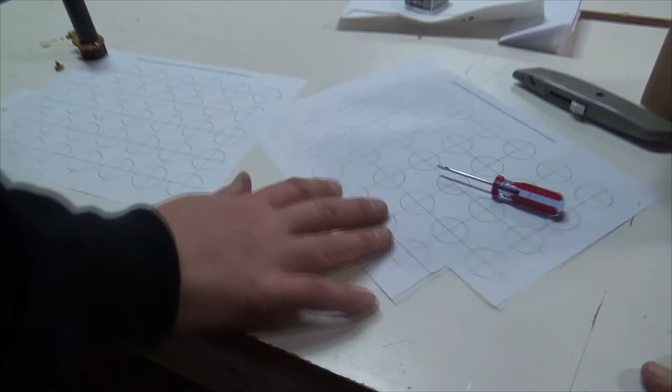So these are the targets. You've got one, the file name is laser alignment mirror targets, and the other file is laser alignment final target. The difference is 25 millimeter diameter and 28 millimeter diameter, 28 point something 4. I'll show you why I did that in a bit.

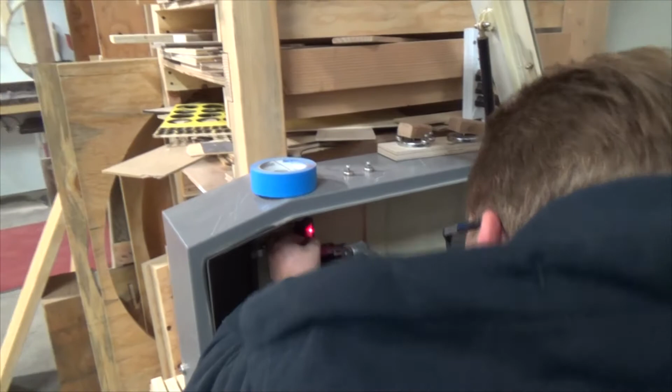Alright, so you take a 25 millimeter target and you try to get it centered on the mirror holder. Piece of tape on it. Get it.

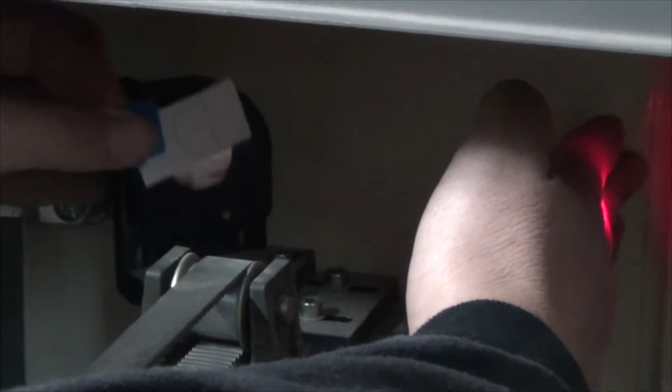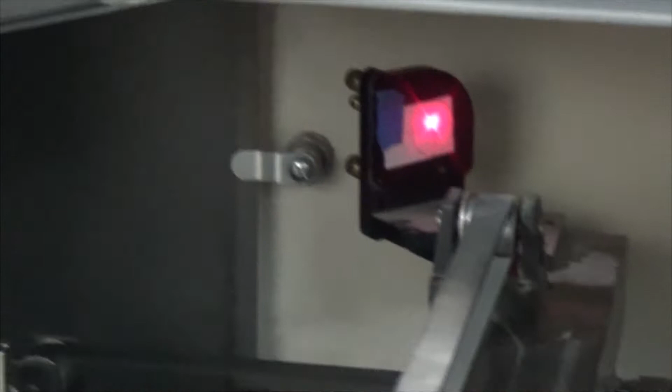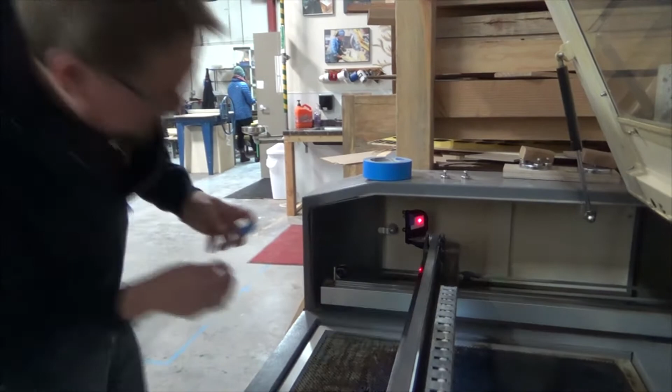Centered, completely ignore the position of the red dot, because we don't know if the laser beam itself is aligned yet. So the red dot doesn't mean anything until we get the beam itself. So you want to block the red off so I can get a good shot of it, yeah, there it is.

Alright, so that's mounted on, prepared for alignment. Yeah. Okay.

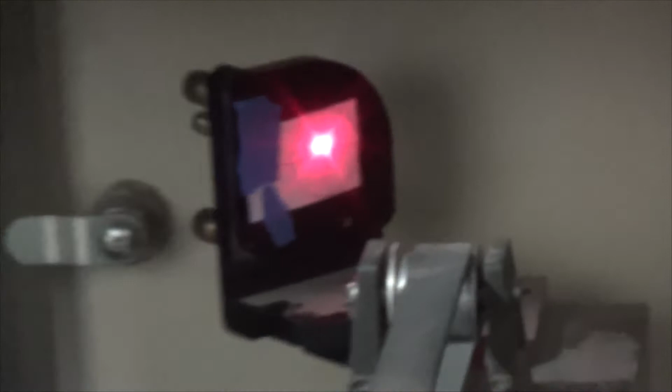Then we're gonna move to the test fire option, which is the lightning bolt. To do that, you have to move into one of the Z move modes. So we're gonna hit this until it says fast Z and test.

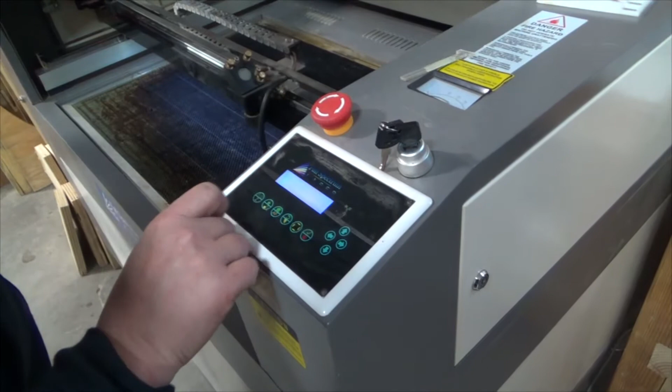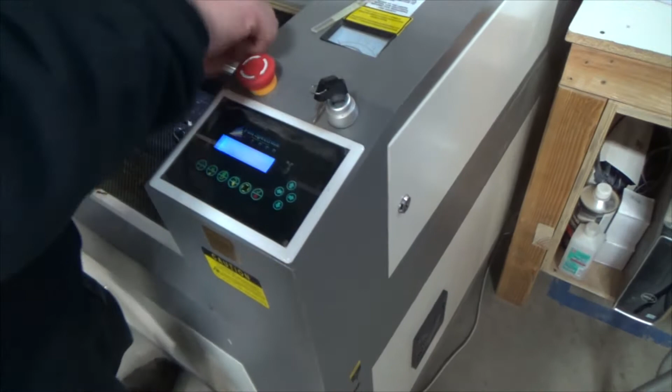We're gonna take a magnet, a strong magnet, put it on the, bypass the safety, and your cooling on/off switches over here. We'll need this.

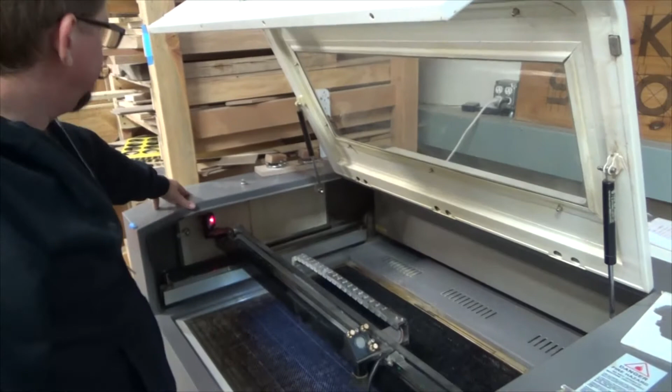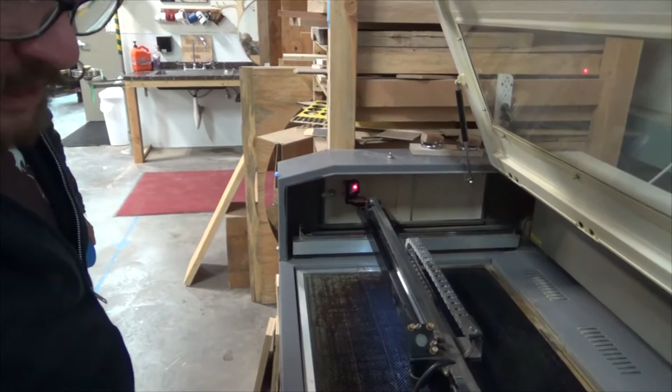Then we'll hit the test fire button a few times, until we get a mark on the paper.

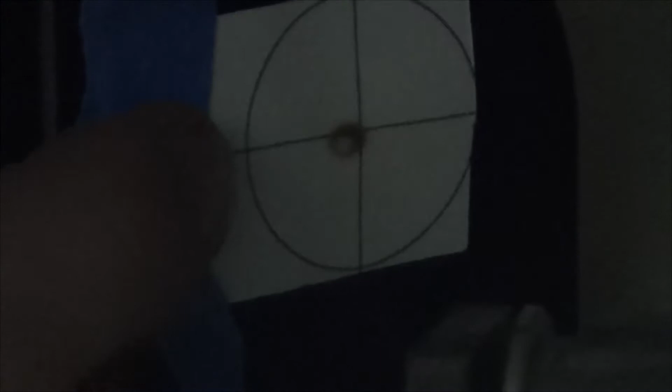So right now, we've got a dot that's pretty much centered. Really, you don't, this is good enough. You don't need to worry about getting all the way back there and adjusting those mirror adjustments. You can totally get this in line using this.

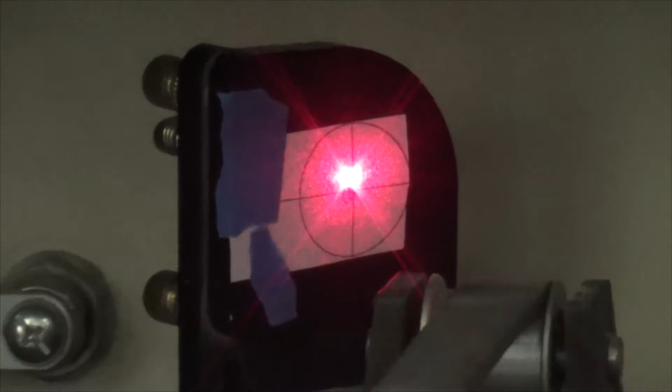So we'll take off the target. Tightening that one. The beam needs to move back, so the mirror needs to kick up like this a little bit. Loosen the lock nut. Give it a couple turns to adjust.

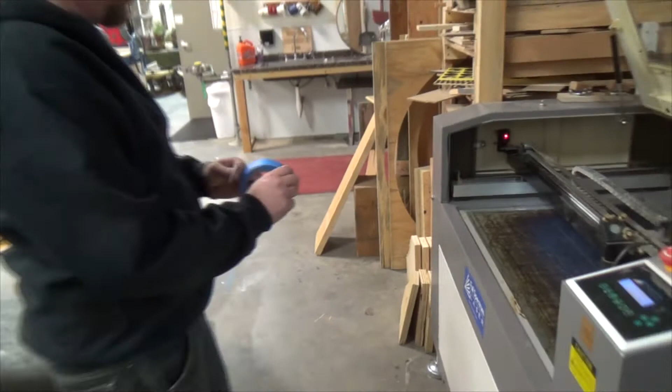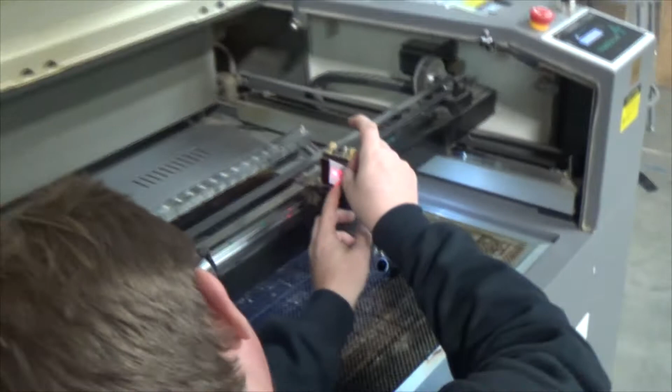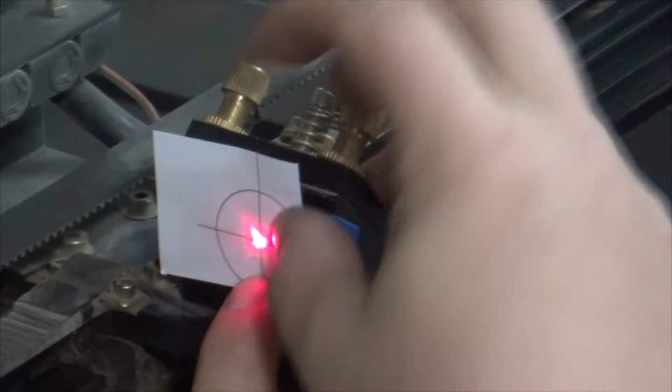Fire again. There's our new dot. We're good this way. Need to go a little bit more. There, it is.

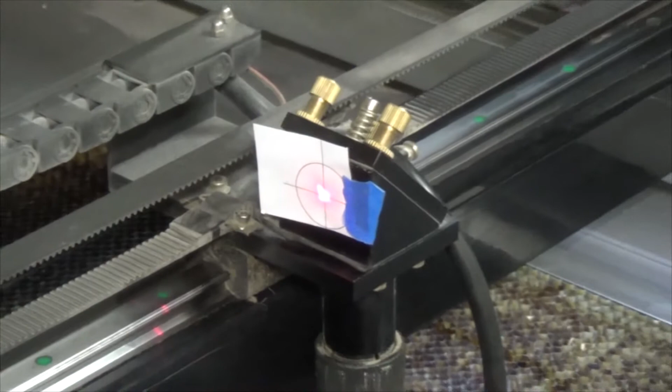Test fire again a few times, making this little adjustment. Okay, so you can see our scorch mark is centered left and right, but low.

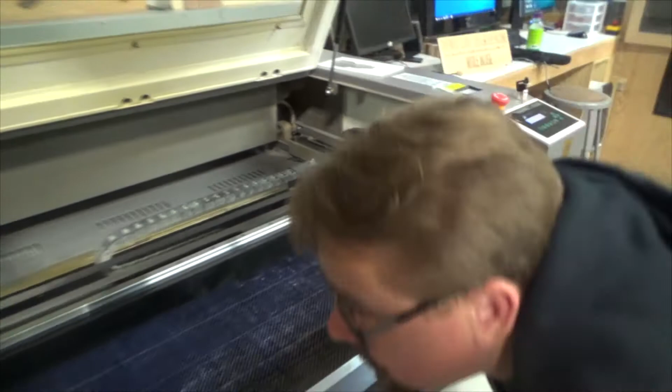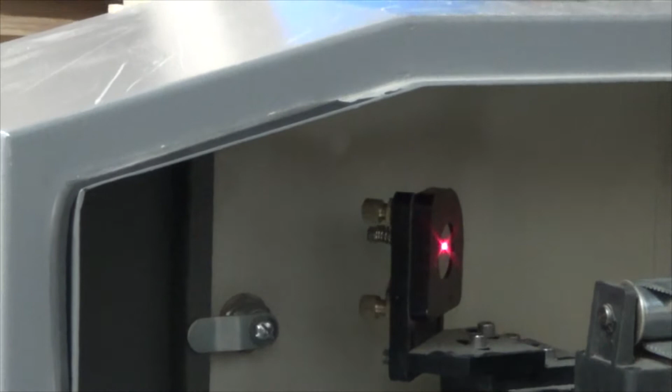So on the back of the mirror housing, this way, and this one will adjust the mirror this way. The secondary mirror back there has the same thing, but it's a little harder for you to shoot that angle, so I'm going to adjust the mirror to raise the beam up because it's shooting low.

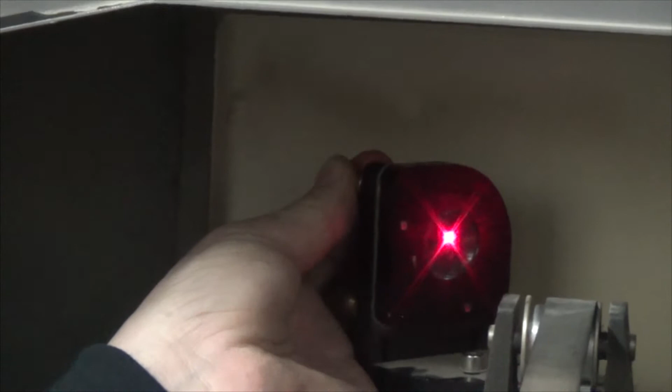That's this top adjustment. I'm going to back it off to raise the beam. I'm going to test fire again. And now we're right in the center.

So now we're good to go with our beam getting to this mirror. Now that the knobs are adjusted, there's little lock rings, they act as jam nuts. We're going to tighten those down so we don't get any vibrational changes.

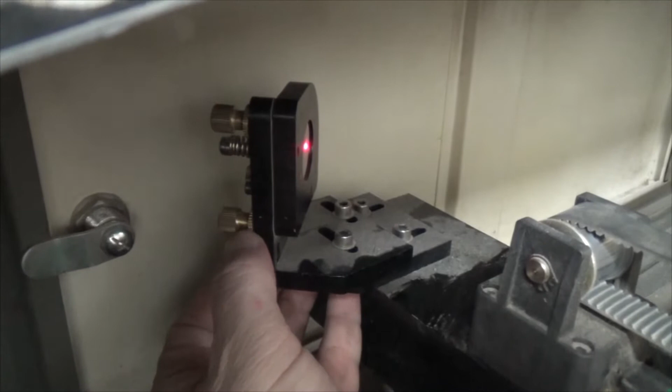How tight do those need to be? As tight as you can get them with your fingernail. I've just got my fingernail on the ring and I'm just pushing down in the right direction to tighten it. That should prevent it from moving on its own.

Alright, this is the new part. Something new I've come up with last night, actually. We're going to take... Are these important? They wouldn't be there if they weren't.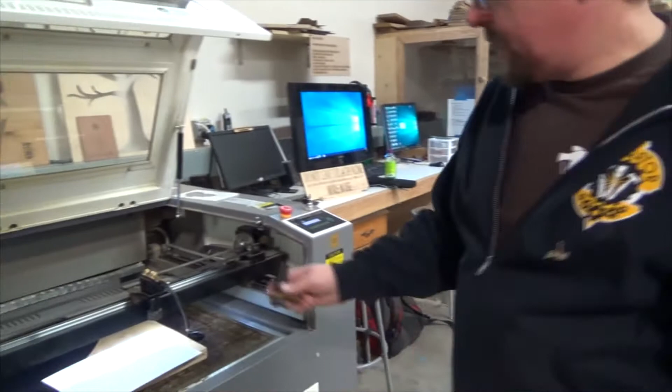Okay, so what we're going to do, it's different. We're going to take our sheet of target. This is the 28.4 millimeter target. The diameter of these targets is such that you can just see the line if you line up the lens holder. So it just makes it real easy to get it perfectly lined up.

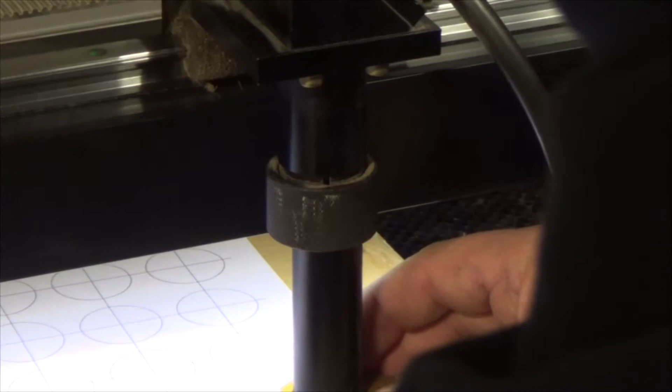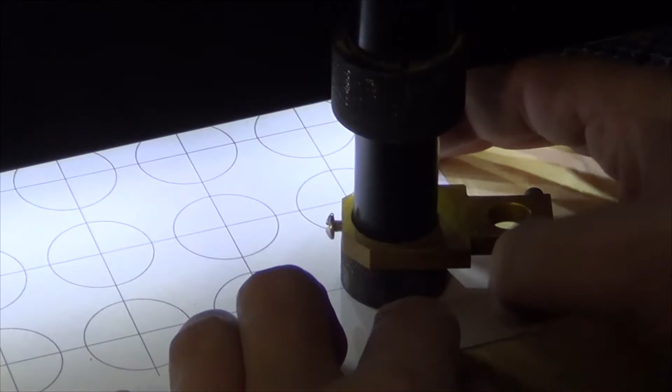Okay, so we're going to line up with the lens input, with the lens holder in place, no lens. We're going to line the target up so that the circle evenly appears all the way around. You should just be able to see it all the way around the holder.

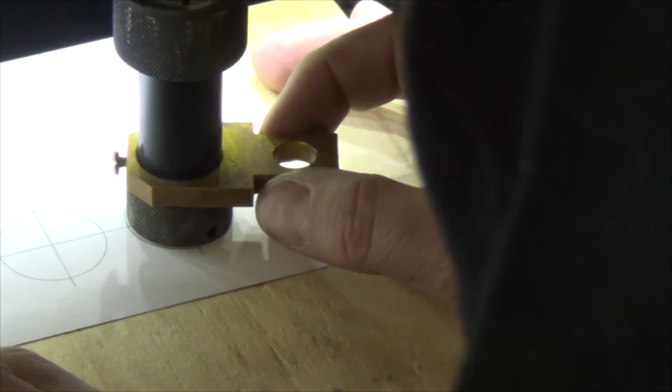You want your table high enough that it's not wiggling too much. We're going to tighten the holder down, adjust our target so that it's pretty centered. And we're going to tape it down so it doesn't move.

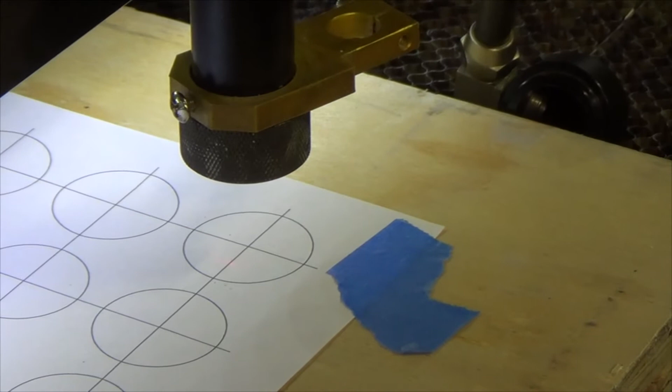So we're going to lower our table back down so we know that this is lined up with the holder. We're going to test fire. So we get that. So tightening that one.

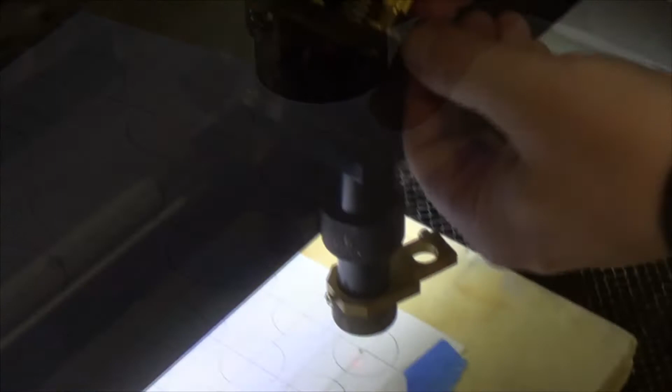The beam needs to move back because the mirror needs to kick up like this a little bit. Loosen the lock nut. Give it a couple turns to adjust. Fire again.

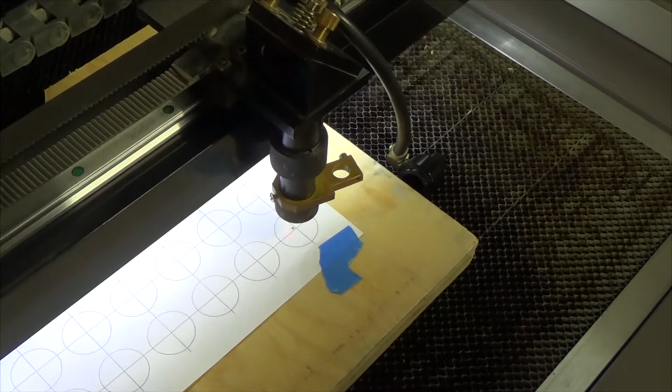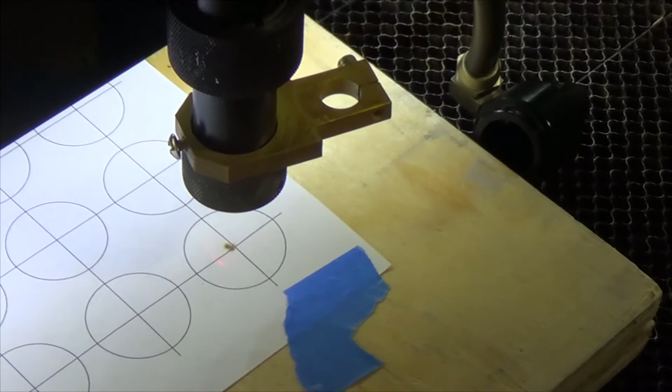There's our new dot. We're good this way. Need to go a little bit more. There we go. All right. We're pretty good. Loosen that up, let it drop, make sure we're pretty much in alignment. We are.

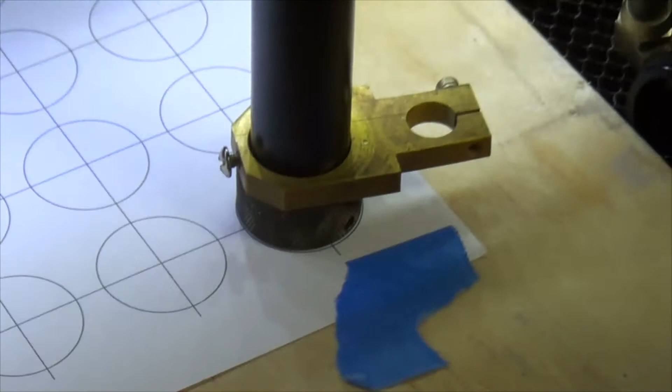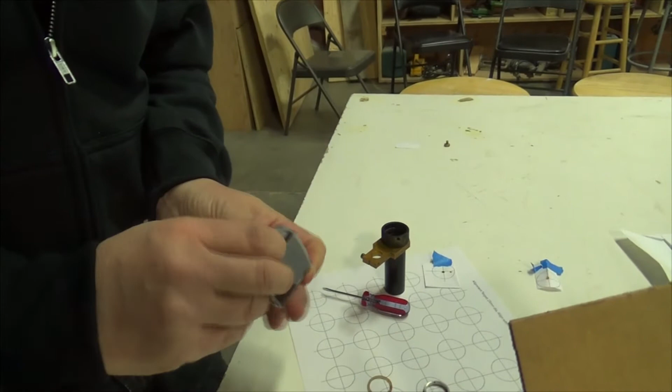Now we'll put the lens in. Make sure the convex side is up. This being up.

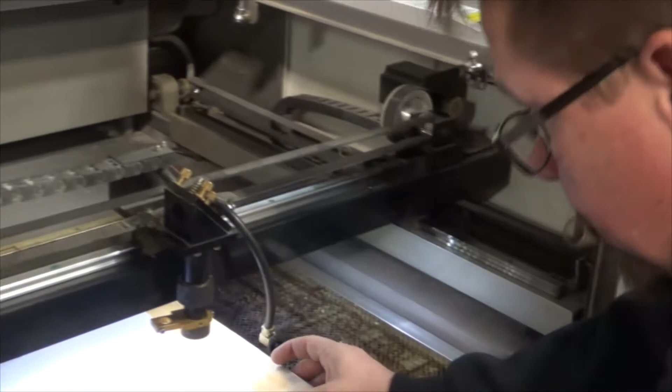So we're going to lock that down. We're going to get our target lined up just like before.

Assuming that's the right. There's our focus. How critical is that, the focus? Yeah, you've got about a millimeter, maybe a millimeter and a half of your focal range. It's good to be close.

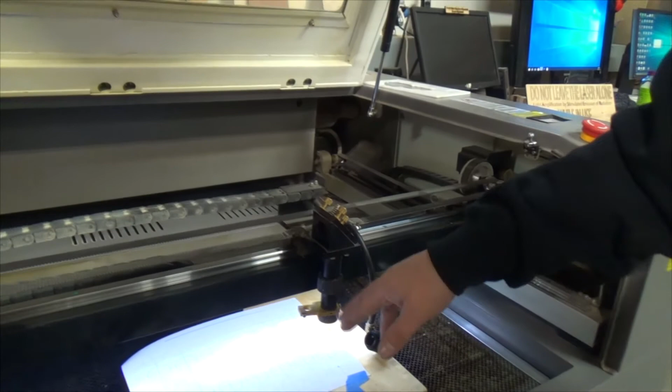We're still ignoring the red dot because we haven't dialed it in. We want to make sure that now with the lens in, that we're putting a hole right through the center of the target.

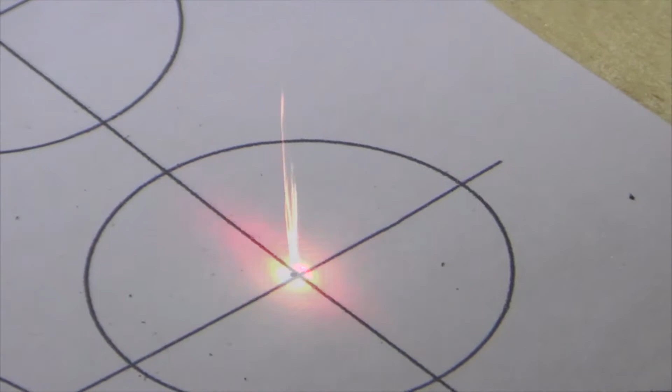Couldn't really get more centered than that. That's pretty awesome right there. Everything's aligned.

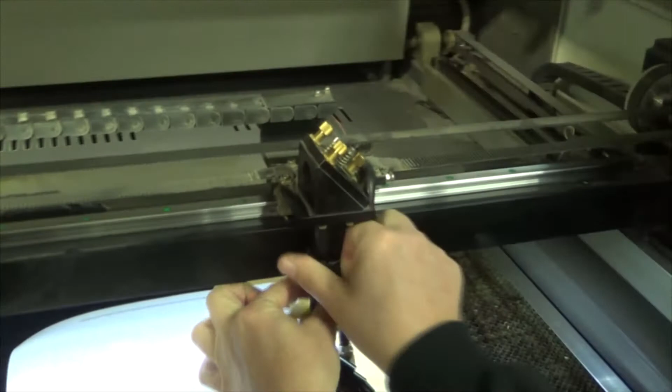Lock these rings down. Yep. To get the lens holder to sit flush on the target for the alignment, you have to take the little knob off that holds the air assist.

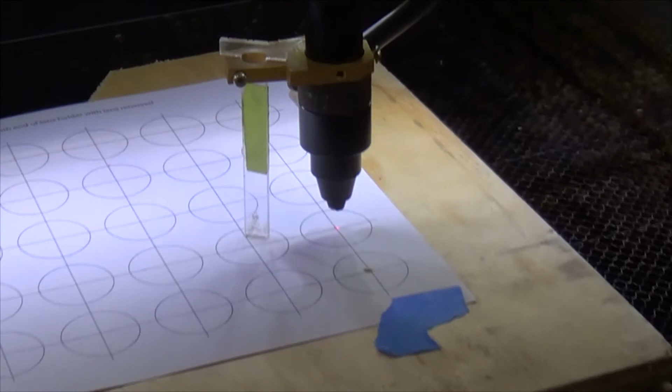Still good. That's it. Okay. Tighten these things down. Or did you ever get those? Well, let's just double check that you did.

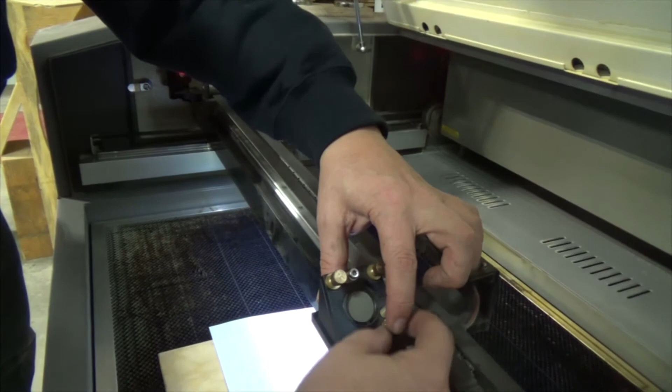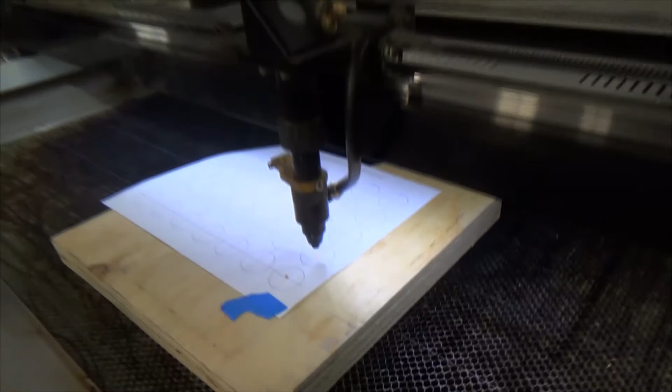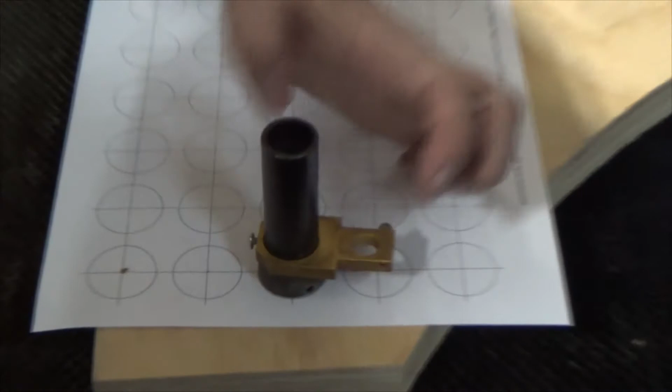Raise the table up and you align this so that you can just barely, and you have to take this off for it to sit flat, just barely see the circle all the way around. That will get you close enough for what we're doing.

Then lock this down and lower the table back down. And first you do it without the lens and you try to get the beam pretty much close on the target. And once you get it close, then you put the lens back in.

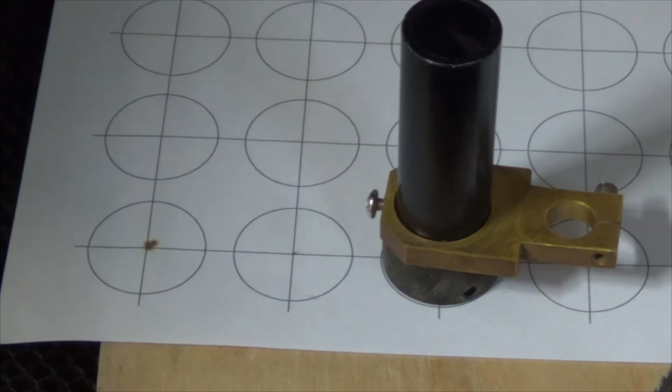Set the focal length and then fire it. And then fine tune, adjust these really carefully, until that dot just takes out the center of the target.

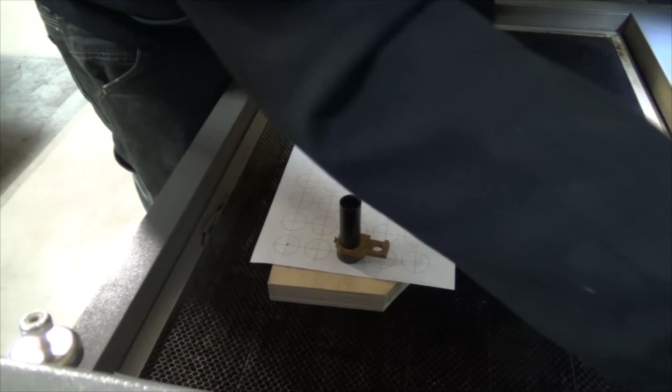And that's aligning the final mirror? Yes. Okay, yeah, 'cause we didn't do that last time, right? These brass pieces are for aligning the final mirror.

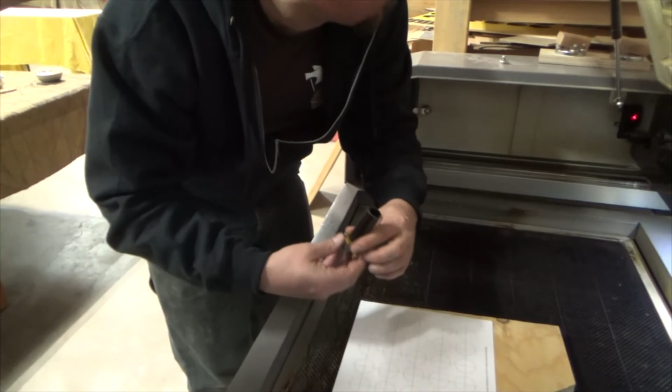Now tell me about, you said that the mirrors can get knocked off alignment just from vibration. This little ring down here, this is a lock nut. By tightening this down, it sort of jams and puts pressure on this, so it can't move easily on its own, can't vibrate. If these aren't tight, these will vibrate and change, and that's how you get out of alignment. One of the ways to get out of alignment.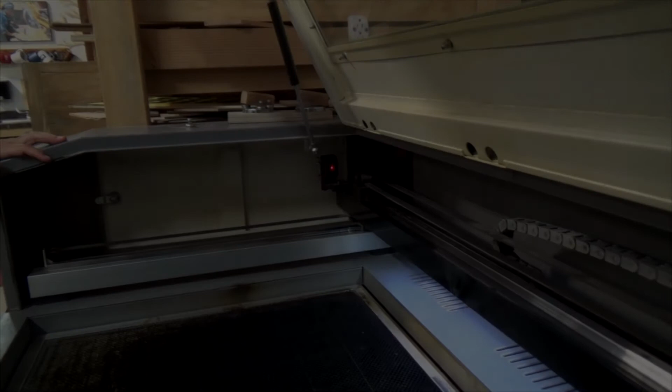But never from the power of the laser? No. Once you have all the mirrors adjusted for the main beam, the holder for the laser diode has its own little adjustment screws. You don't ever want to touch the main mirrors to adjust the red dot. You only want to adjust those screws. I see.